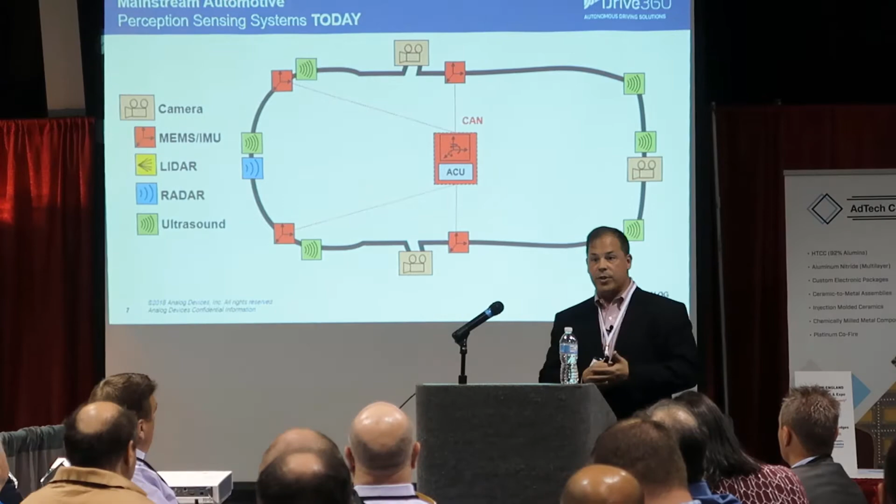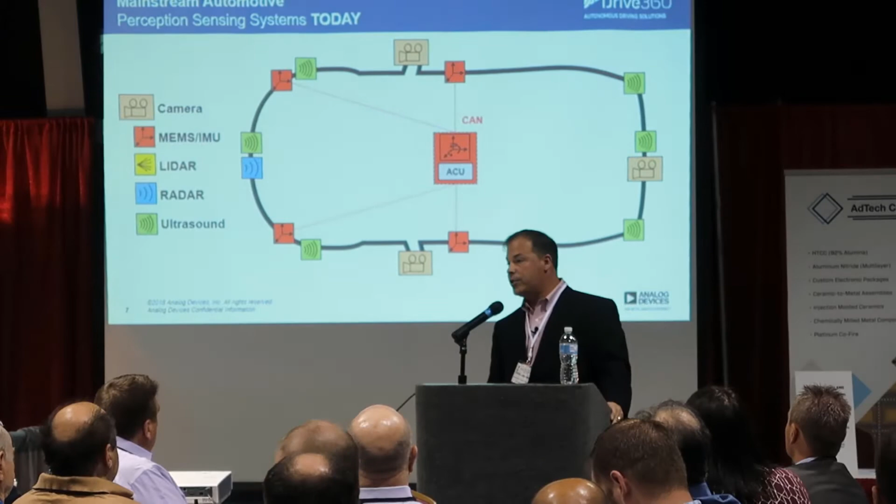Let's look at the car today. So today, in the automobile, you have several ultrasonic sensors. So these are the little bullet holes in your bumper that you have in order to aid in your parking. I can tell you that car companies absolutely hate those types of things because they may be cheap, but you have to keep inventory for every single color of an automobile. And so maybe the technology is cheap, but the inventory holding costs are huge on that. So they're trying to get those out of the automobile.

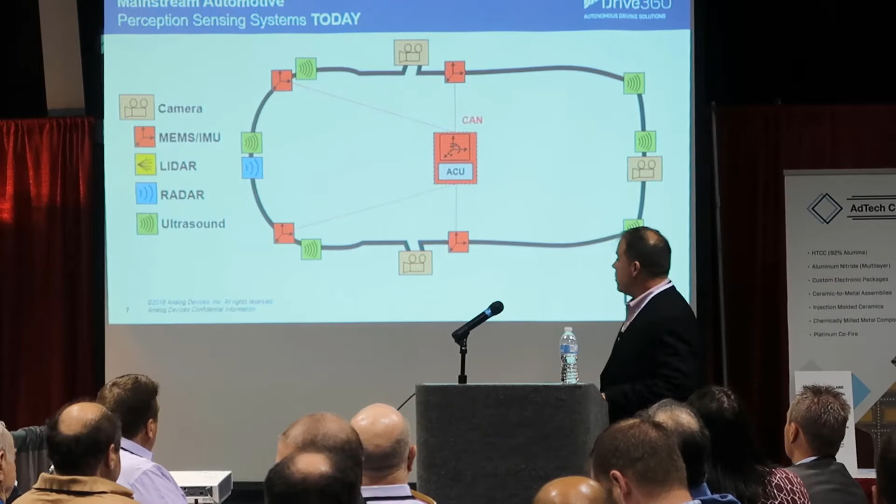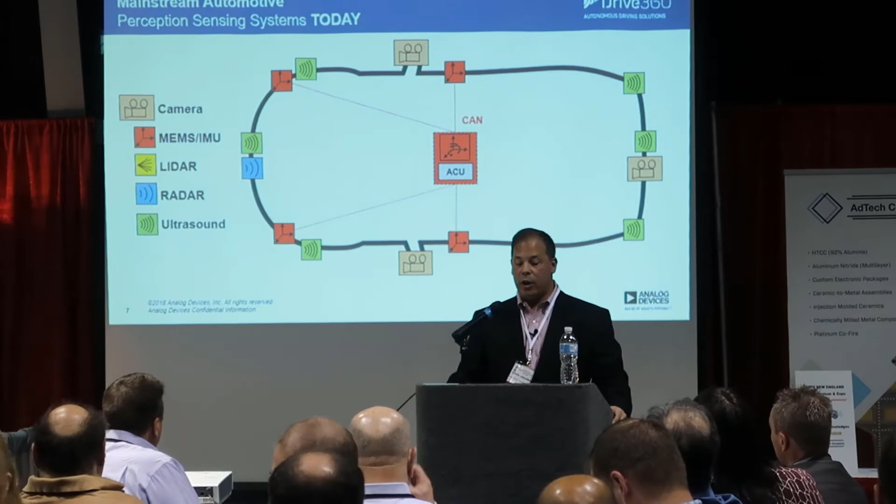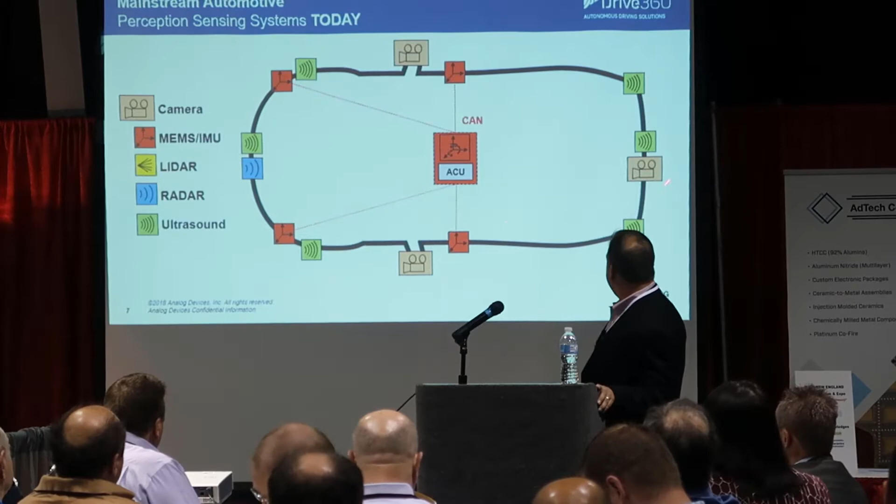You have several airbag sensors, whether it's on the B pillar of the automobile or on the front of the automobile, in order to detect a crash in certain instances. And then maybe you have a front-facing radar in some of your more premium automobiles, and a backup camera here. And then there's some central ESC, or electronic stability control gyro, in the center of your car that manages, when you go around turns, to make sure that the stability of the automobile is kept in check.

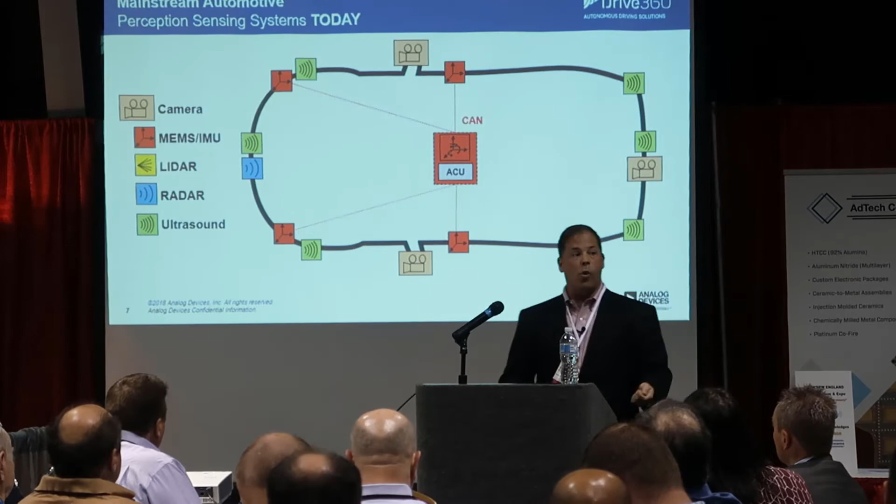But going forward, as we work with these car OEMs and we look at the technology of the future, the car looks more like this. In your car, you're going to have anywhere from 6 to 10 radar sensors with different types of frequency modalities that would be able to take advantage of both short range and long range needs here.

You're going to have several LiDAR systems, whether it be a time of flight system for short range or a long range scanning system, in order to develop a more comprehensive view around the car. You're also going to continue to have cameras, but perhaps not as prevalent as you would think. Right, so cameras are very good visually, so you can see them here.

Perhaps there'll be an e-mirror technology where cameras will actually replace your rear view mirrors. You'll have a front-facing camera here and a rear-facing camera, but radar and LiDAR is a very, very important technology to fuse with that existing camera data here. One thing that's interesting is that this big processor is starting to appear in the center of the car.

So NVIDIA, who used to develop graphic processors for high-performance video game applications, well, they are now getting into the gig of developing GPU processors for artificial intelligence systems for automobiles. It just so happens that the technology and the fabrics used in GPUs, or graphics processing units, are very appropriate for both of these types of applications. And so they've done a huge pivot to this.

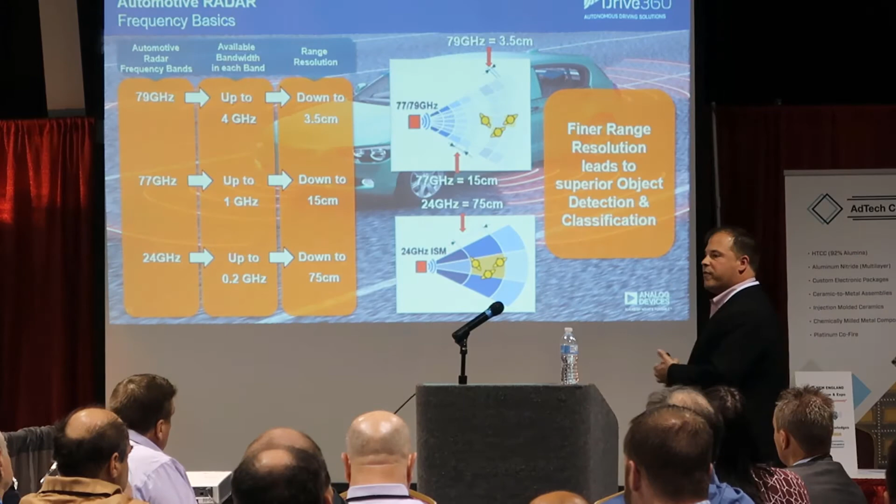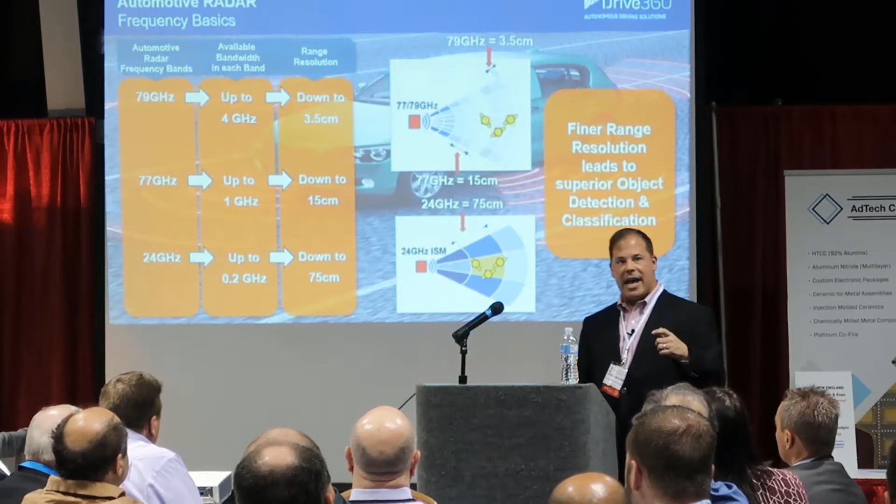Okay, so we're going to get into a little bit more technology now. So I wanted to give you a little bit of a primer on automotive radar. Again, many of you have these in your cars today, blind spot detection or lane change assist. These are based on the 24 gigahertz frequency modality. Basically, if you do the math, based on the 200 megahertz bandwidth that has been allocated to that particular frequency band, you can see down to about 75 centimeters, right? Again, when you drive your automobile today and you have your blind spot camera on, you basically see car. That's it. And sometimes you don't even pay attention to it because the system is faulty to some extent.

So there's a lot of improvements that we're making in this space, and we see the whole industry moving to 77 and 79 gigahertz, and that poses some very interesting challenges and opportunities for all of us. So firstly, when you go to 77 or 79 gigahertz, you are able to discern a much finer range resolution than in today's system, down to 3 to 3.5 centimeters.

Why is that important? If you're looking 200 meters out in front of the car and you see a truck, and next to that large truck there is a small child, how are you going to be able to discern those two things? In radar systems today, it just looks like a big blob. But if you have the range and angular resolution that the architecture and the frequency band afford, you will be able to discern those small objects that are in the presence of large objects.

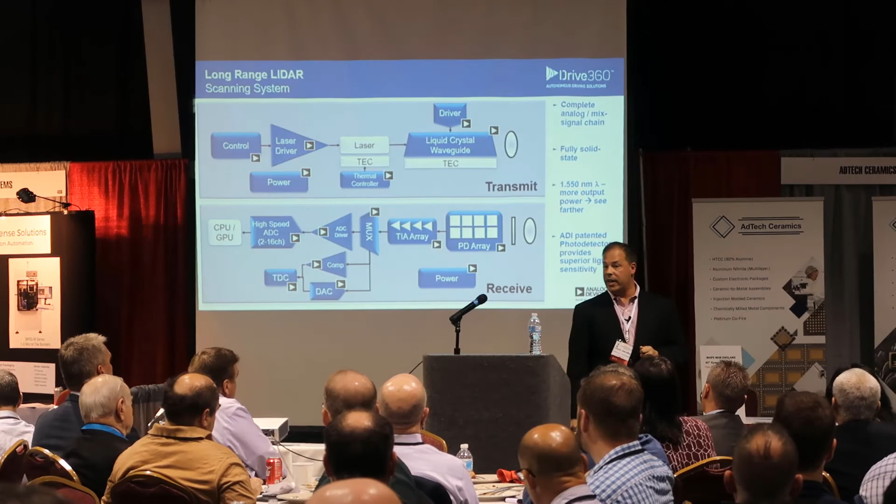And so that's an important piece here, but that brings a lot of challenges into the system. Not only on the beam steering side and the laser side, but also on the photodetector side, because photodetectors at 1550 nanometer are not readily available today in an automotive qualified version. So we're working on a lot of that here. But you can see here, bringing this all together, this is going to be tough.

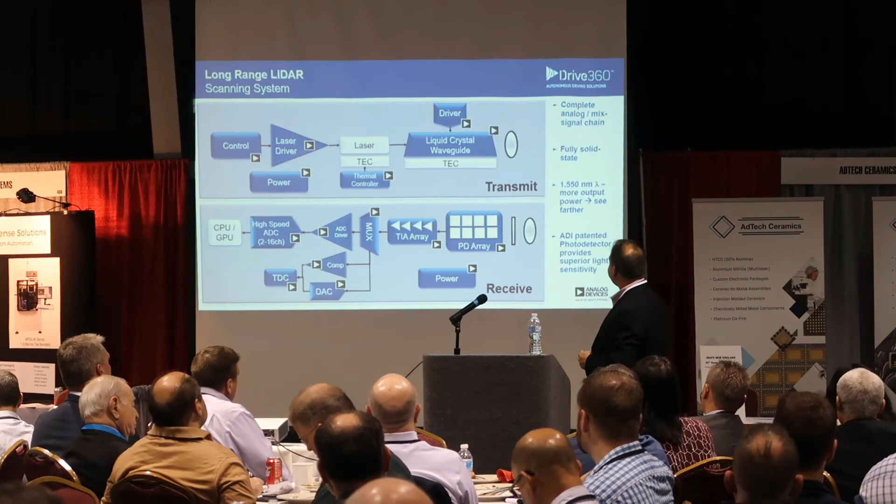A little bit more on the manufacturing challenges and what exactly is a liquid crystal waveguide. A liquid crystal waveguide is not unlike the liquid crystal matrix that you see on your PCs today. And we like that because that means that it can be built pretty cheap, because PC displays and different LCD displays are pretty robust from a manufacturing standpoint.

But if you shine the laser beam through the plane of the display and put a high voltage potential across it, you change the index of refraction of that matrix and you can steer the laser beam. So it's very elegant in its operation. It's pretty damn complicated in how to build it. But again, we like that to some extent.

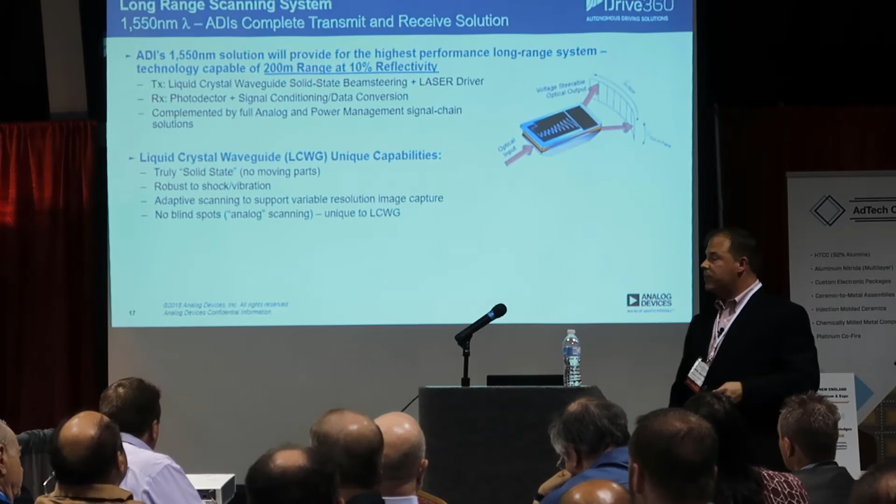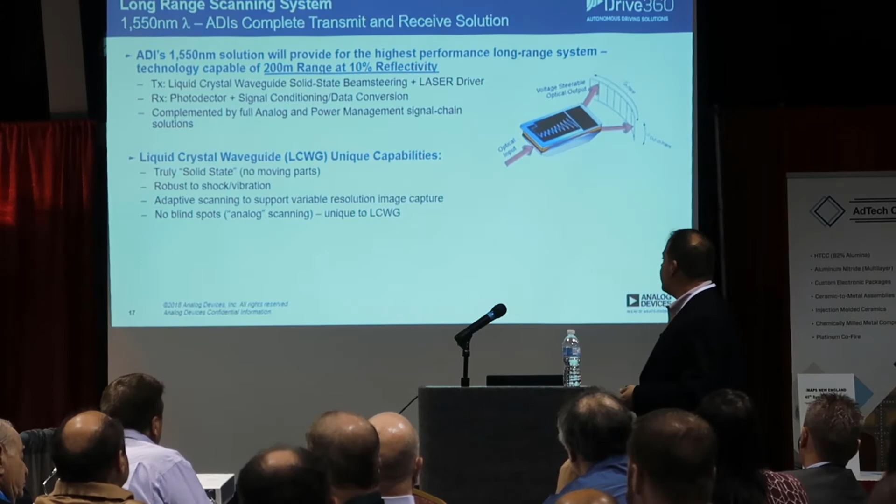So it's very interesting because it's truly solid state, no moving parts. Robust to shock and vibration. The MEMS mirrors have a lot of those issues, and the adaptive scanning I mentioned and the blind spots that come with other systems are not plagued here. But if we look at how we're going to build this thing, you can see here that there's an angle of this facet of this liquid crystal waveguide that has to be precision manufactured.

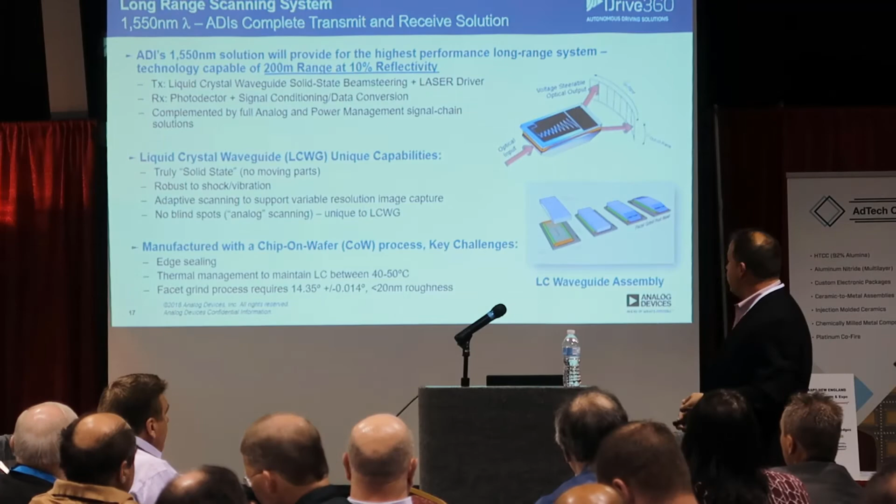There's a lot of challenges associated with maintaining this type of tolerance. The roughness is very important because the laser beam is going through it, so you can't make this too rough, otherwise it will disperse the actual beam of light. There's a lot of challenges associated with just manufacturing this.

This is probably about a half inch by one inch. These things are very, very small, completely unlike that big spinner sitting on top of the car today.

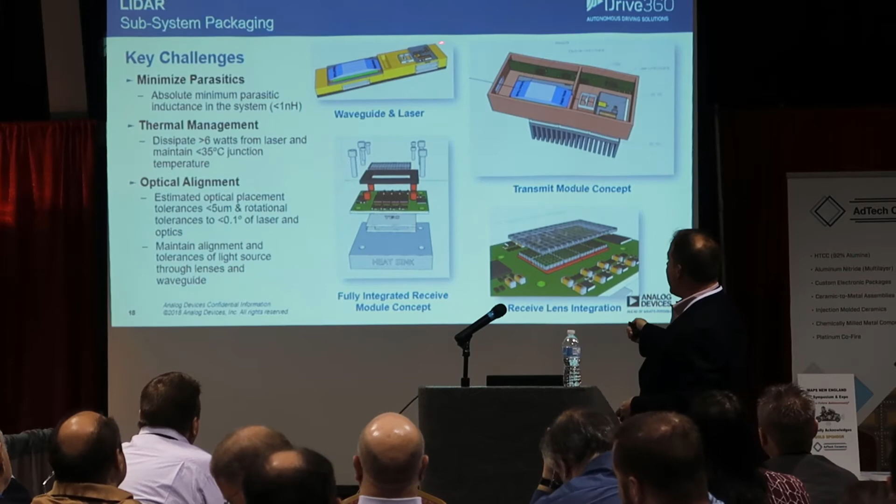So if you look at some of the other things we're putting together and how we're going to construct this, up here you can see we have a laser coupled with the waveguide. There's a huge challenge associated with the alignment of these optical components. You're pumping a lot of current through this laser, so you have to minimize the inductance of the entire system. We have a thermoelectric cooler because we have a laser pumping out a lot of current, and we have to get the heat out of the system.

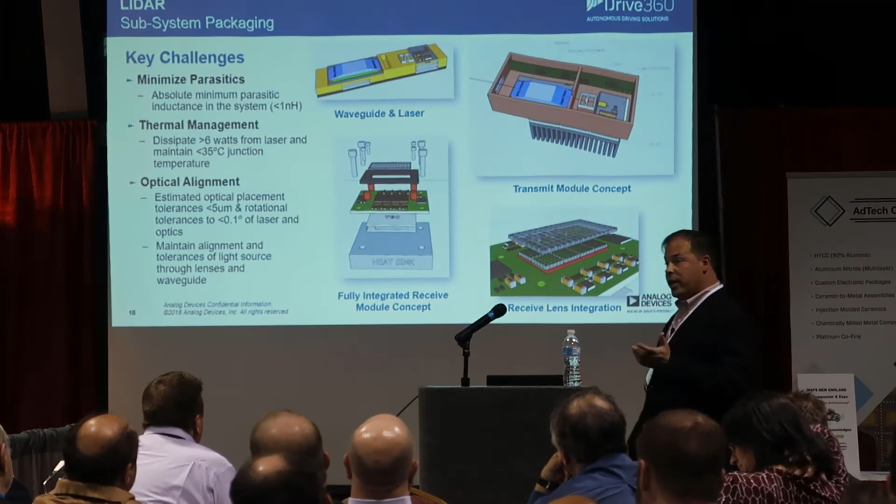Unfortunately, one issue with liquid crystal waveguides is that they don't work too well in low temperatures. You've seen this in your display in your car before, that the response time is inversely proportional to the temperature. Having an active thermal management system to maintain the operating temperature is a very important piece of the innovation we're bringing to bear.

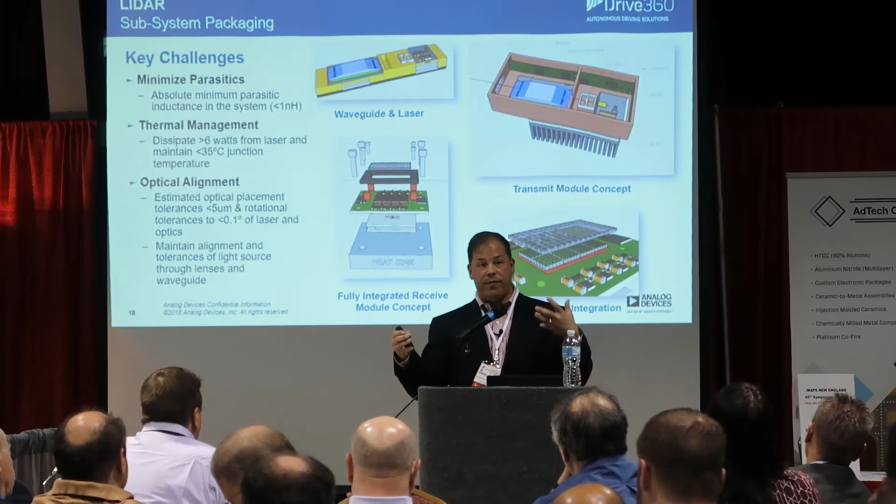On the bottom here we have a couple of receive concepts: an arrayed photodetector array with a transimpedance amplifier behind it. These things also need minimal inductance associated with them, so we can build them in a stack configuration like you see here. There's a micro lens on top because we have to focus the light on that very small photodetector.

So there's a lot of challenges here when we look at the LiDAR system overall. All right, that's the LiDAR story.

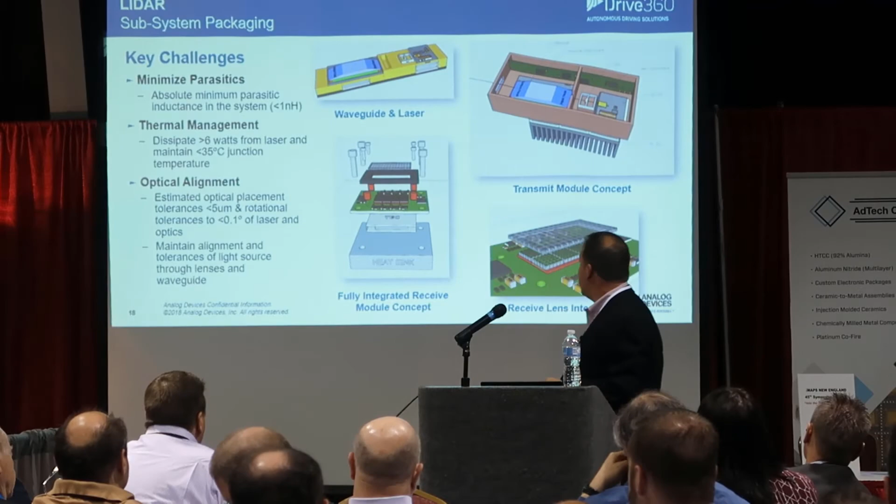How am I doing on time? Forty-four minutes, okay. So just a couple more slides here.

I wanted to give a plug also to these Inertial MEMS products. As I mentioned, they're the unsung hero of a lot of these systems today, but they are also absolutely fundamental to these cars.

They are the cornerstone of the crash system on every car built in the world today—airbag sensors and, most recently, stability control, which is very prevalent here in North America and the EU, and just starting to take off in China. We've been in this space for over 20 years.

We actually do the inertial measurement units that go on aerospace and defense drones and different types of high-end applications, and now we're bringing that technology into the automotive space. If we can fly a drone, that technology or performance is actually appropriate for these types of applications. As I mentioned, this is very important for what's known as dead reckoning.

If everything else in your system fails, are you going to continue to go in the direction you're going in? You can fuse it with a GPS signal and a precision map. You're not going to operate without the eyes of the car—your radar, your LiDAR, and your camera—but it provides the backup in case it's caked with snow or you have some catastrophic failure. It will be able to pull you over to the side of the road safely.

So these systems are going to be much more prevalent in the automobile of the future. One thing that's also interesting about this MEMS technology is what's known as condition-based monitoring.

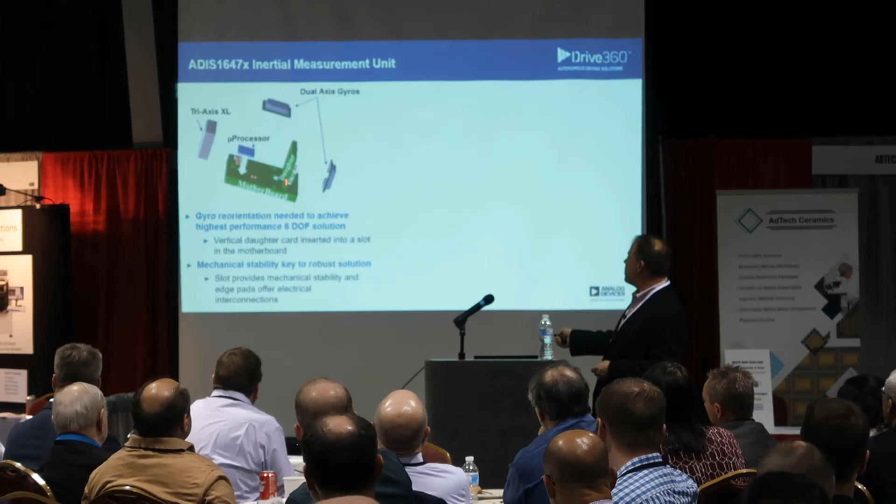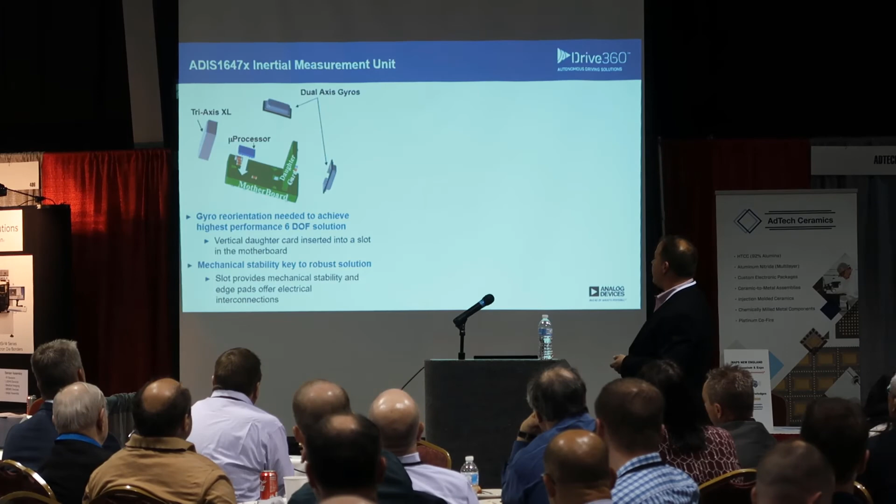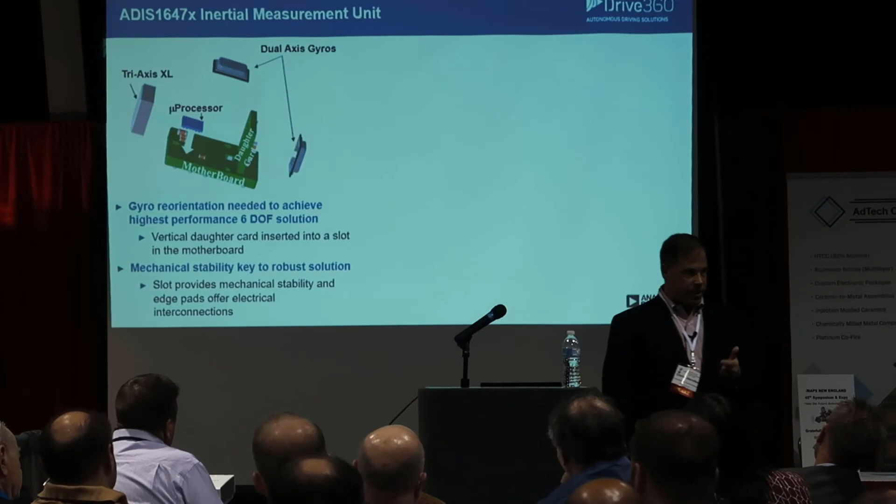What the gyro actually looks like. Why do we do that? We need the highest performance gyro, so we have to mount one of them—it actually does all of the cross-axis. We need rigidity in the system, and also to make it very mechanically stiff.

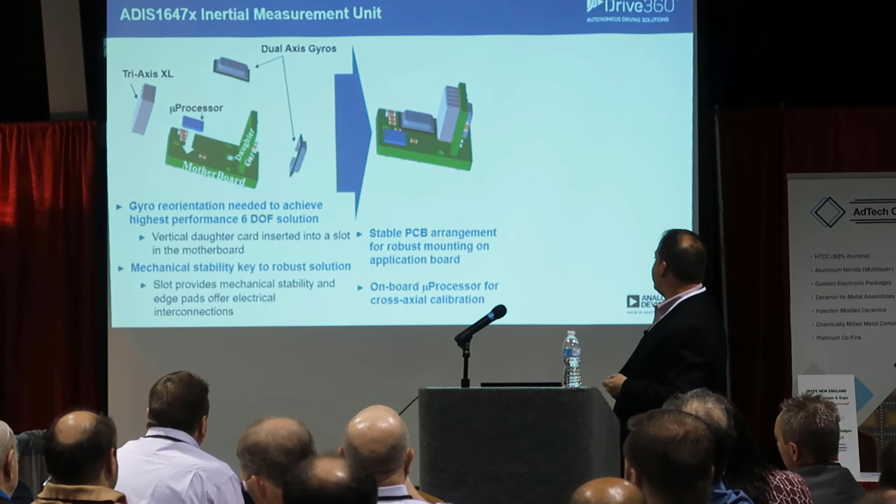And the idea is that we put it together in a way to allow our customers to mount it to the board in a very robust way, and then we put this liquid crystal polymer cap, put some stabilizing ribs in.

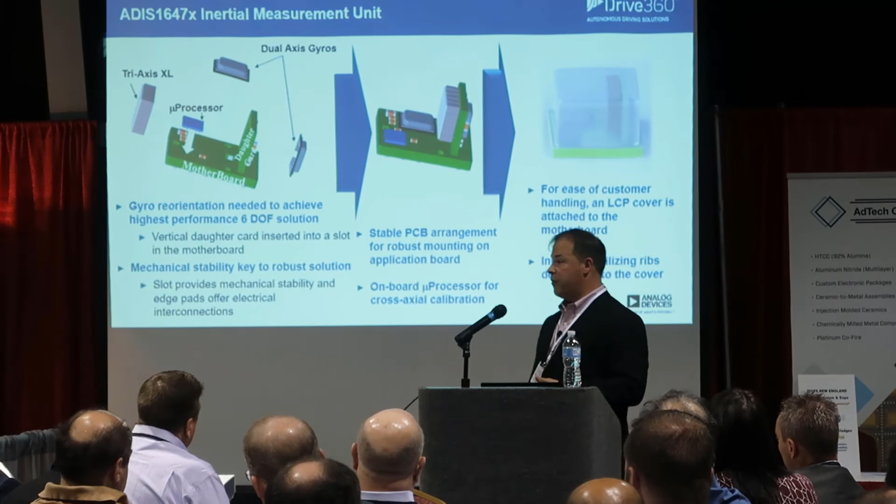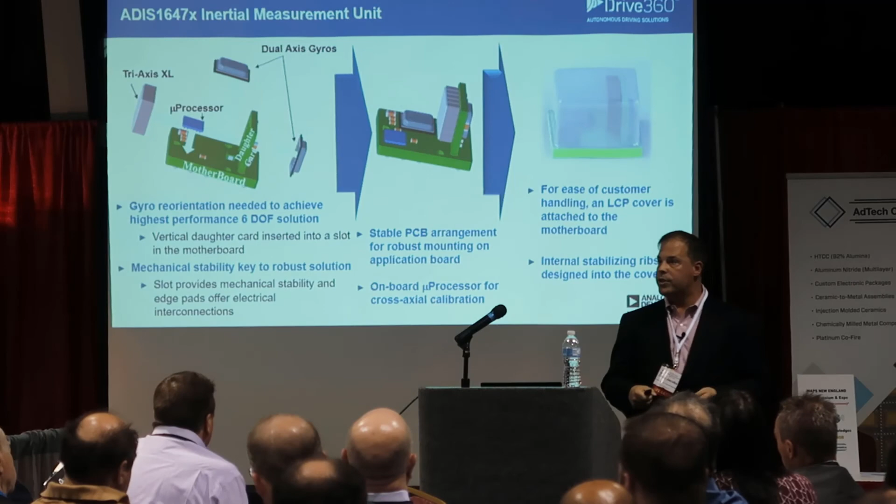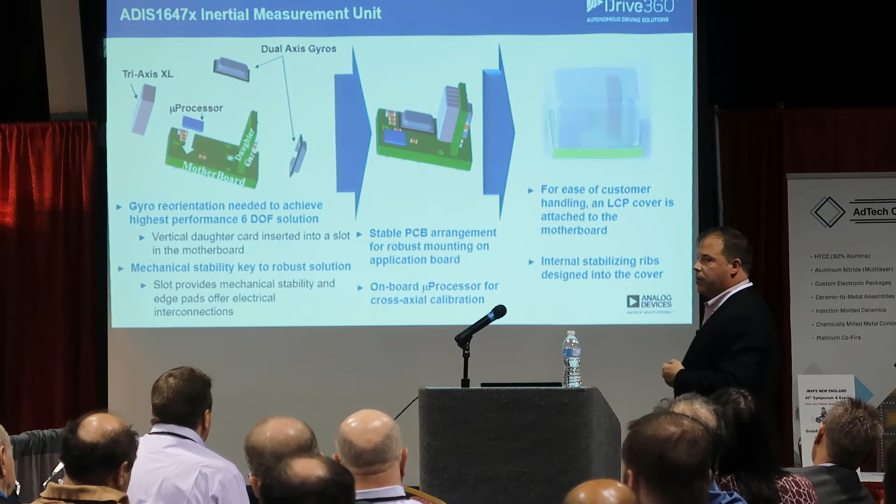This is what we see in some of these advanced drone applications. Again, that microprocessor—there's a lot of things we could do with that to fuse the data together to keep that high performance going. The simulation I showed you last time, that was one of the high performance gyros. But if you put this all together and put an algorithm around it, all of a sudden you're cooking with gas.

All right, I kind of want to leave you with this—my last slide here, and this is a call to action to all of us. This is a changing landscape in what we're dealing with. The amount of investment going on in this space, the amount of innovation being brought to bear in these applications, the gaps that we see today—this is really an opportunity for all of us.

One thing: performance is valued. That's very important, right? That means we're going to get paid for the innovation we provide in these systems. These are not commoditized systems. They are not perfect today, they are not robust. There's a lot of work we need to do, and I shared with you some of the challenges here.

Industry is evolving. If I look at the car company, I work for a tier 2—many of you guys are tier 3s, right? We're pretty far down on the food chain when it comes to this, but a lot of times we're the guys bringing the most innovation to the party. In the past, I would work with a tier 1, which would then work with the car company, and I was discouraged from actually talking to the car companies directly, because my tier 1 partner took that responsibility.